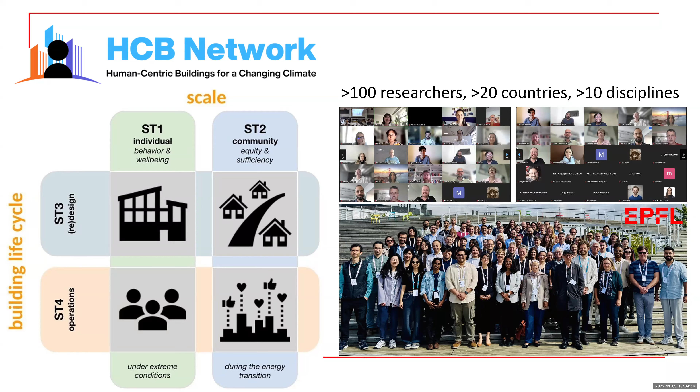With that said, I want to dive into this topic. I'm not going to talk about my PhD other than to give my origin story of why I went from being purely an engineer to recognizing the importance of people.

My PhD project involved developing a design tool that allowed designers to rapidly change different parameters for a house and understand the energy implications. But at the time, I was really frustrated because things like the set point, lighting, and equipment that people used tended to have a much bigger impact on predicted performance than things like insulation and windows.

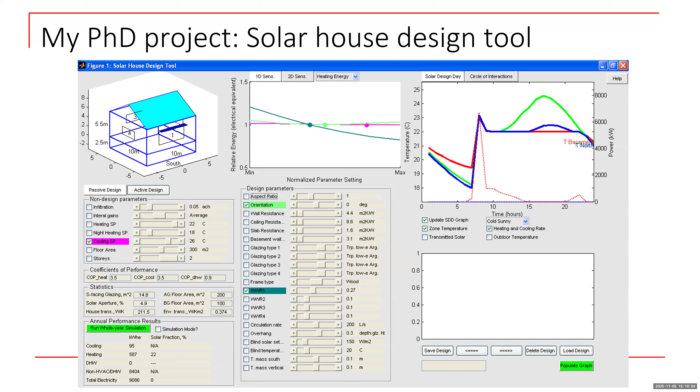At the time that was frustrating, but now I appreciate it opens up a huge area of research. It's particularly notable that as our buildings become more efficient—we've mastered envelopes and to some extent HVAC, our lighting's never been more efficient—the role of the occupants in relative terms is much more significant. That's one of the reasons we've seen an explosion of growth in this research area.

Back in my PhD, I had a case study building, an award-winning house, and I think it was very successful. But it was also eye-opening to me, because the house is textbook perfect: large south-facing windows, thermal mass, a PV and thermal roof, a ground source heat pump, which was fairly novel at the time. From an engineering perspective, this house is near perfect, and I still think it's a great house. But it was eye-opening when I talked to the occupants who moved into it, and looked at some of the things they did.

I'll just highlight a few things. One of the things they did was to cover the thermally massive floor, which has a very important role to store solar energy and release it so the space doesn't overheat. The occupants covered most of this floor with carpet and furniture, which renders it much less effective.

On the other hand, if you think about the perspective of the occupants, they didn't want a cold floor that they'd come down to in the morning with bare feet.

The north side of the house had almost no windows, and surprise, surprise, the occupants installed a lot of lighting, and it was not very energy efficient. Had the designers anticipated this, they could have at least put in energy efficient lighting. But the most surprising thing they did was to put a very high powered 5 kilowatt electric heater in the garage.

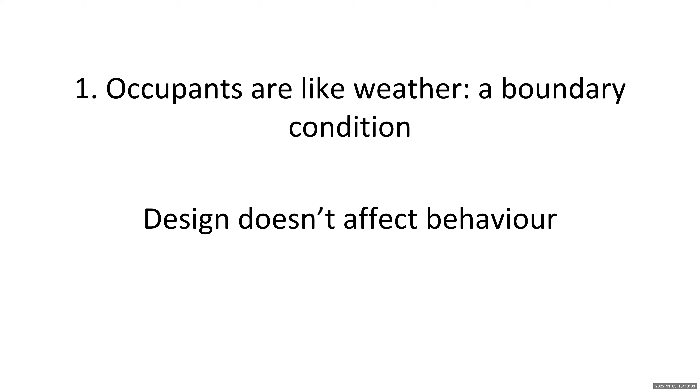So the first myth is that occupants are like weather, they're just a boundary condition. A translation of this is: design doesn't affect behavior. So that's our first myth of the day—people are not a boundary condition.

In the case of weather, if we're doing modeling, simulation, or even measurement of real performance, the weather affects the building, but the building doesn't really affect the weather. Of course there's things like climate change—I'm not denying that. What I'm saying is we don't usually design our buildings thinking we're going to change the local weather, except for some nuanced cases like microclimates.

In contrast, there's a two-way relationship between people and buildings. If people are not comfortable, for example, they will actively change the buildings. So it's simply not the same situation.

But unfortunately, this idea is often reinforced. This is a figure from the ASHRAE Advanced Energy Design Guide, which I think is fantastic because it tries to show in a single diagram all of the different building systems and the relationships between them and the heat flows. To look at this already is a huge upgrade from what's typically done, where we have kind of siloed design. But I'll note that sure enough, the occupants are in the corner, and they're merely, according to this, a source of sensible and latent heat gains, and also things like odor and CO2.

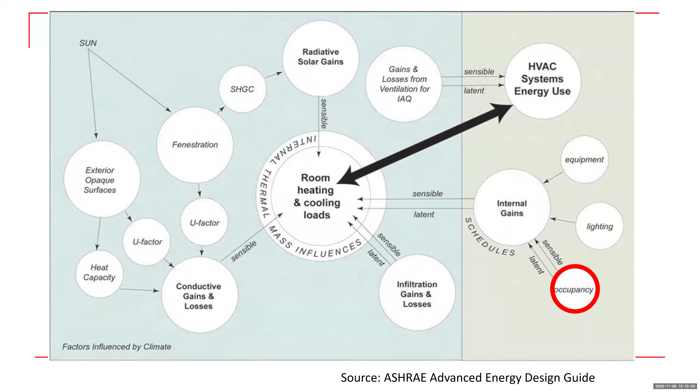So this is reinforcing the idea that occupants are just a source of noise. Building codes also tend to do this.

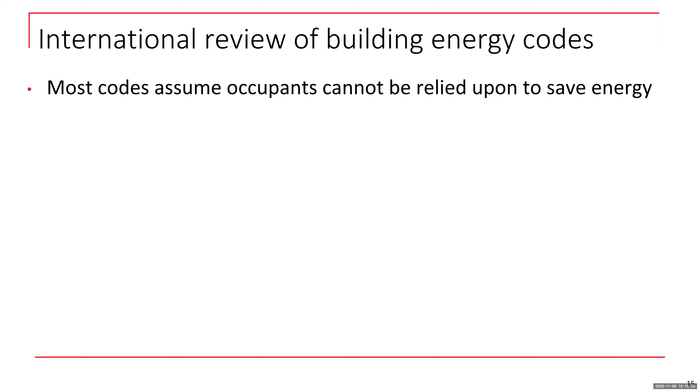We've done a huge review of building codes for our previous project, and we found a lot of building codes won't even acknowledge occupants. They have very indirect ways of saying people, users, or occupants without actually saying it. It's quite remarkable. And on the one hand, it's understandable.

For example, ASHRAE 90.1, which many building codes are based on, says in no case shall schedules differ where controls are manual. This is code for: you can't assume good things about occupants.

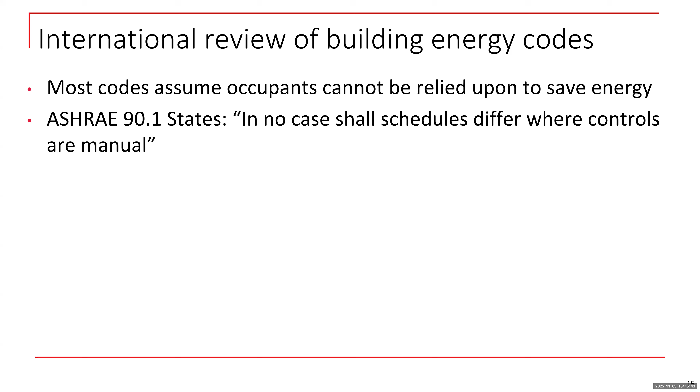And the National Energy Code of Canada for Buildings says something very similar—basically, you can make some assumptions, but you cannot assume optimistic things about people. This may be fair because it's obviously subject to lots of cheating if we make good assumptions about people, when certainly there's uncertainty.

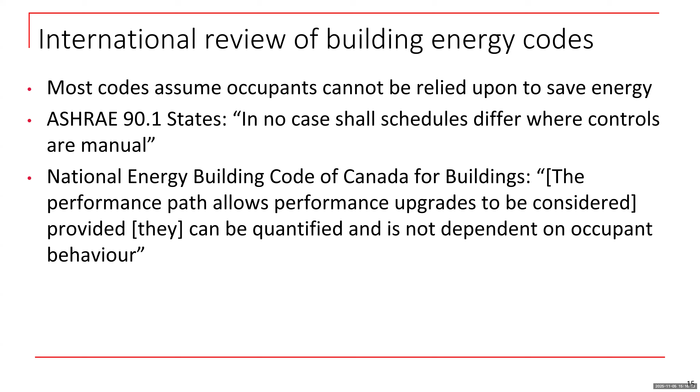But we're also taking the license away from designers to try to design better buildings for people.

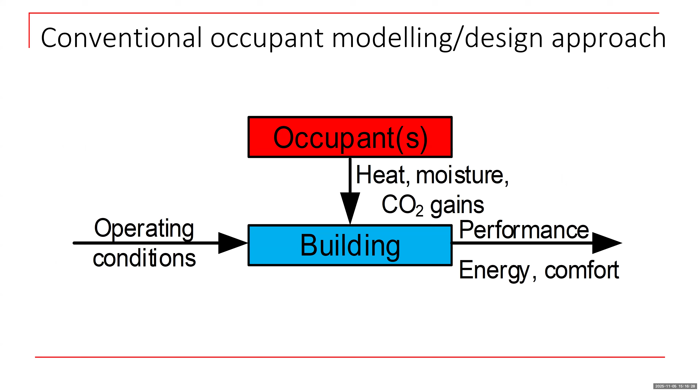So what I'm advocating for is going from this model that says occupants are just a source of noise on buildings, and that results in some performance, whether it's energy or emissions or comfort, to more of a two-way diagram that says buildings affect people, people affect buildings. There's all sorts of intermediate steps in there, like indoor environmental quality, interfaces that nudge people, etc.

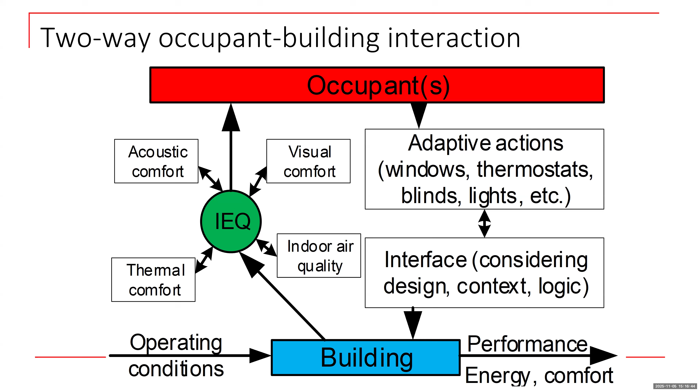More on that later. But just as one illustrative example for how design affects people, because I really believe a lot of designers, or especially engineers, don't think that you can affect behavior. I did a case study where we looked at two residential buildings in Ottawa. In brief, the one with big windows has occupants that close their shades or curtains a lot more than the one with small windows, so much so that effectively the open area where there isn't obstruction from shade or walls is very similar. So this, to me, is good evidence that you can affect behavior through design.

So the question here would be, why are we giving people these huge windows when they just keep them closed for privacy, glare, overheating, etc.?

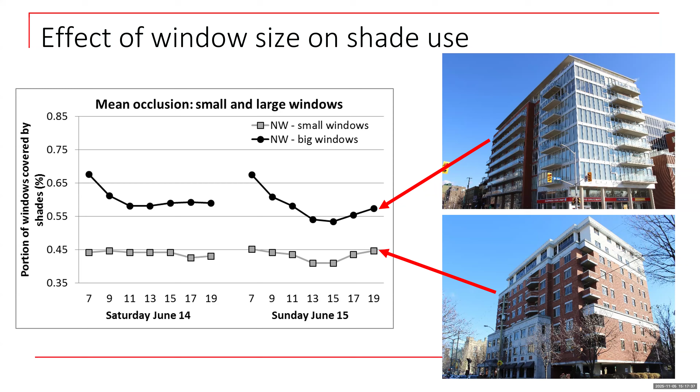I'll also note something we're looking at in our new project is nudging. Here's just a quick example of nudging. A study out of California found that if you signal people and tell them it's good to open the windows now, or it's not wise to open the windows now, then they will feel empowered and sort of validated to open the windows.

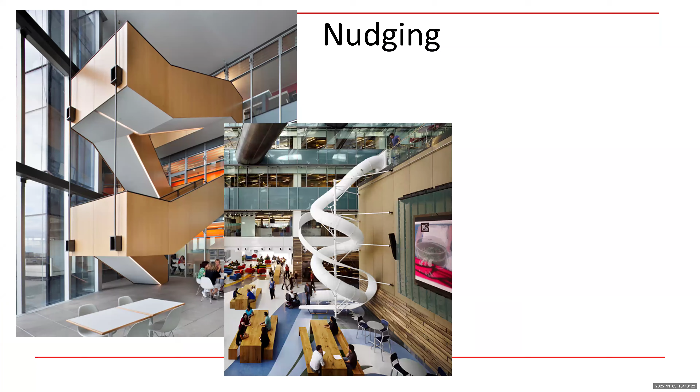Some other examples of nudging: providing nice stairwells, providing a slide even as an alternative to elevators, or messaging that encourages the more energy efficient behavior.

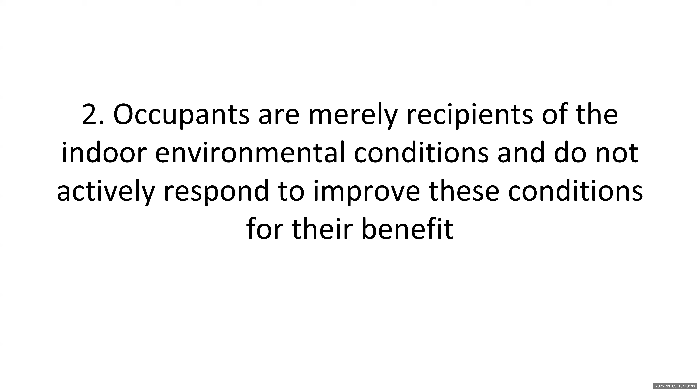Second myth: occupants are merely recipients of the indoor environmental conditions, and do not actively respond to improve these conditions for their benefit. I think this is also a myth.

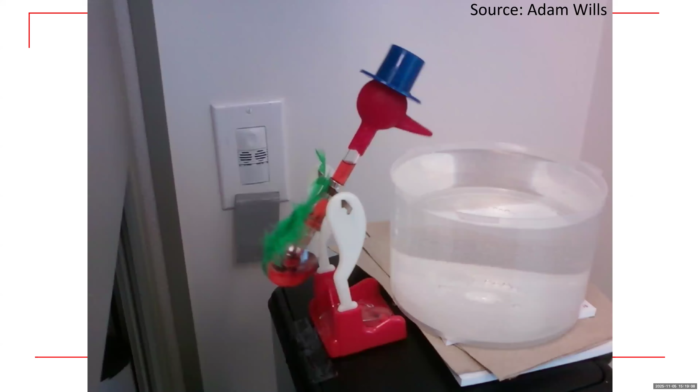Well, this is a case where the occupant, who has a PhD now, outsmarted the lighting controls. So what you're looking at here is a drinking bird that tricks the motion sensor to keep the lights on. But it was completely legitimate why the occupant didn't want the lights to turn off. He was around the corner from the motion sensor, so the lights were turning off prematurely.

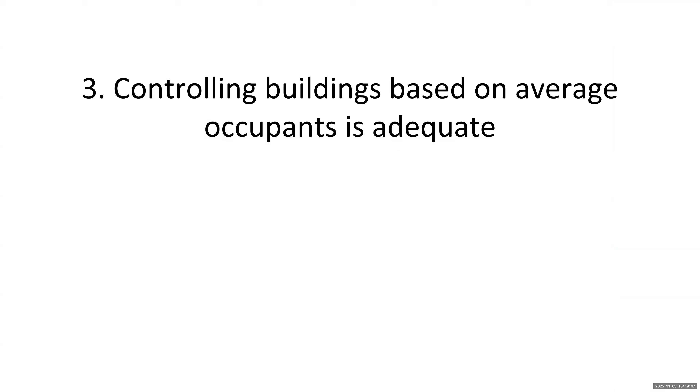Next myth: controlling buildings based on average occupants is adequate. There's just no such thing as an average occupant, or there is in the mind of engineers, but in reality, they're very diverse.

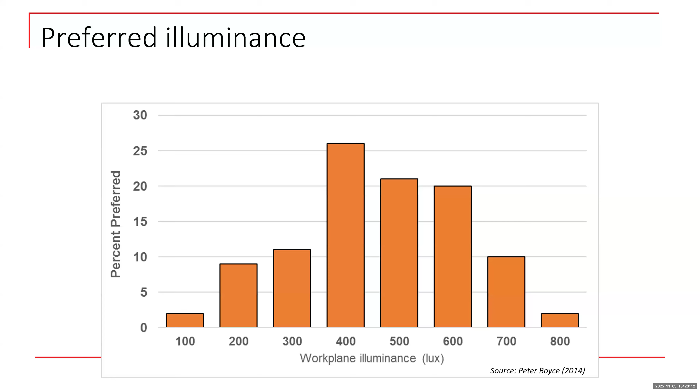Just one example: this is a study from 2014 that tried to come up with the preferred lighting level, I think it was in offices, and the graph shows basically the percent of people that preferred these various conditions, the units in lux. The engineering approach to this is, well, we need to come up with one value that will satisfy most or all. So we just need to choose one value because you can't really have a standard that has ranges, admittedly. So we need to pick that one value.

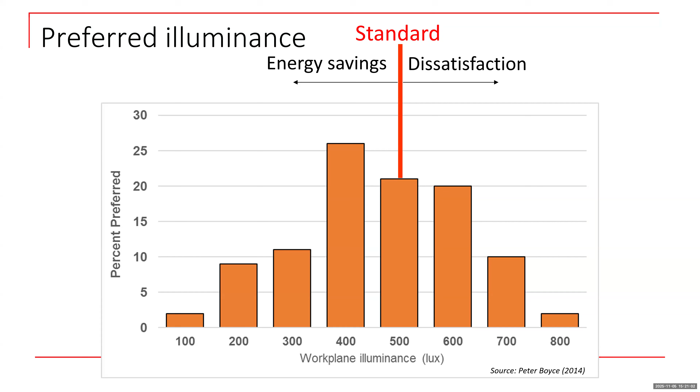The problem with this is that anyone that prefers less than that value would have saved energy if we gave them control. And the people that would prefer more, perhaps for legitimate reasons, like their eyesight isn't good, or they're doing an activity like drawing that requires a lot of light, those people would be dissatisfied. So to assume that everyone is like the average is quite problematic, and not just for discomfort, but also for energy savings.

This is one of my favorites: occupant diversity equals uncertainty equals bad. So engineers do not like uncertainty because uncertainty is very expensive. If there's uncertainty, we need to over-design and take conservative approaches because we don't want bridges to break, cooling systems to be undersized, etc. But I'd like to argue that actually diversity is an excellent thing, and I think we know this, we just forget about it.

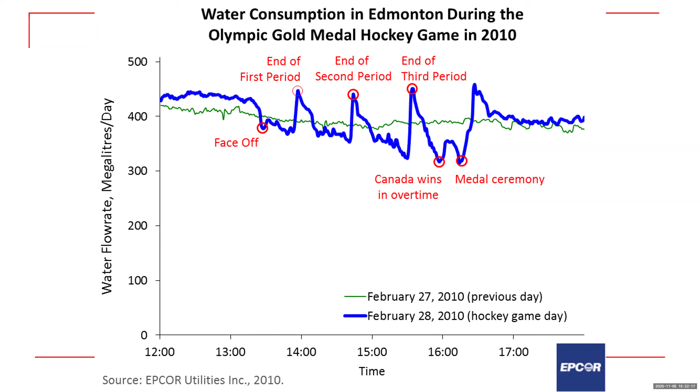Peaks are bad. Peaks mean that we need a system that can achieve the peaks. And if the peaks are really high compared to the average, then our infrastructure or our building needs to be able to achieve those, even if it's oversized for the majority of the time.

If we had average traffic all the time, we could get away with just a couple of lanes. So in a more grounded example, I've done some research looking at how diversity of office workers in terms of schedules can also be really good. Because if we design our office buildings so that on the worst case, the busiest hour of the year, there's enough desks, then we're going to end up with a lot of extra desks, especially in a hotelling situation where people do not sit at the same desk every day.

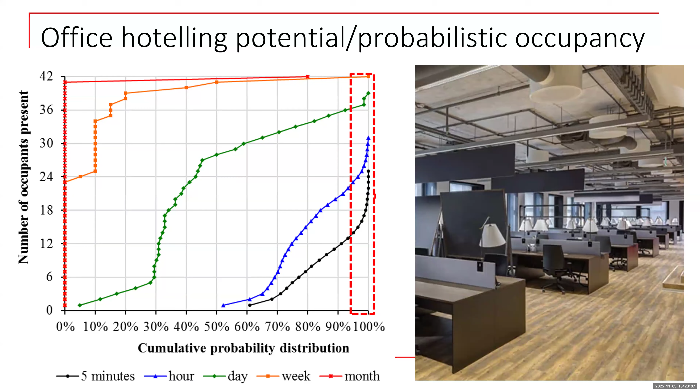Next myth: occupants do not understand how buildings work and will often waste energy relative to design intent. Engineers often will blame occupants, and in some cases that's legitimate. But I'd like to say that that's generally a myth, and I don't think occupants willingly or intentionally waste energy. It's more that they do things that make sense to them, and if that wastes energy, well, maybe we should look at the designer. I'll give one quick example.

My PhD student, for his very first paper, noticed that his friend was keeping his apartment really warm, and my student was not keeping it warm. He asked, how can you afford to keep it so warm? His friend said, well, I don't pay for the heating. It's just included in rent as a fixed fee.

My student measured the temperature in 20 what we call bulk metered units, apartments where heating is included, and 20 where they pay for exactly how much they use. What he observed over the whole heating season is that tenants who paid for their heating kept their apartment on average about 2 degrees colder than their counterparts.

To me, this is an excellent example of how people know how to save energy. If you charge them or have other incentives, they know how to save energy. He also found that the people who pay were much more diligent about keeping schedules, for example, turning down the set point when they were off at work.

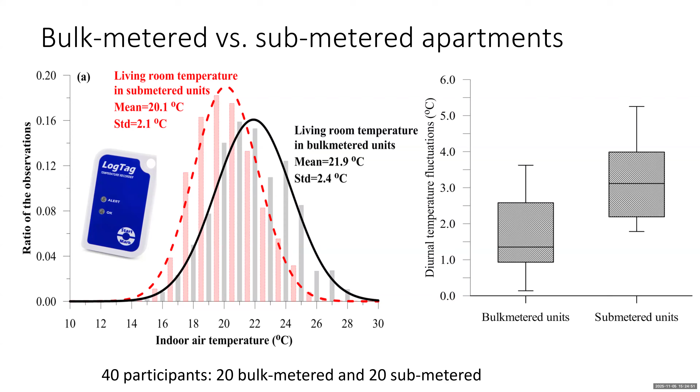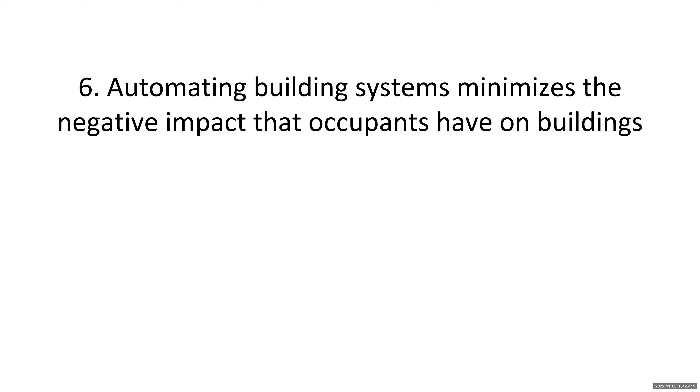Next myth: automating building systems minimizes the negative impact that occupants have on buildings. Engineers like to automate everything because they're very comfortable with things like programming and logic. They're not so comfortable with the complexity of humans. I'll give one example.

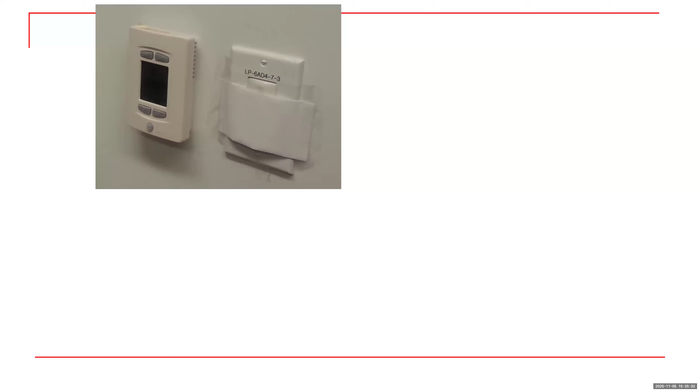This is a building at Carleton University, and it's extremely well daylit, which is very relevant here. The outside of the building is surrounded in professor offices, and the windows are massive, arguably oversized. What we noticed when we did a post-occupancy evaluation here, and it was very surprising, is that many of the occupants covered their motion sensors with tape or paper or even plants. This is quite different than what I showed in the previous example.

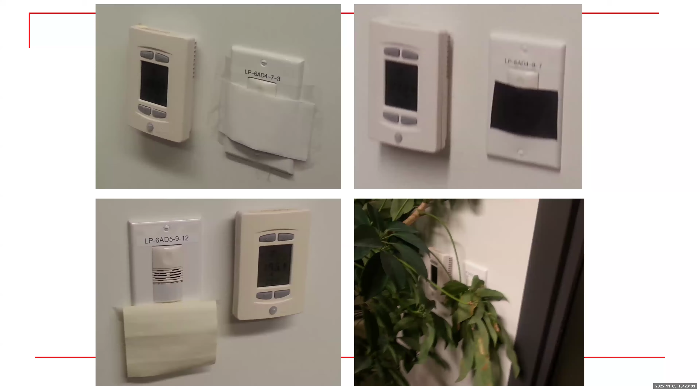We asked them why, and they said, we don't like it when the lights turn on automatically when we walk into our office, because the default controls at the time seem to be that the lights turn on automatically when they detect motion. This is actually against the code now, which I'm glad to say, because it doesn't make much sense. What we discovered is that it's very easy to change the controls.

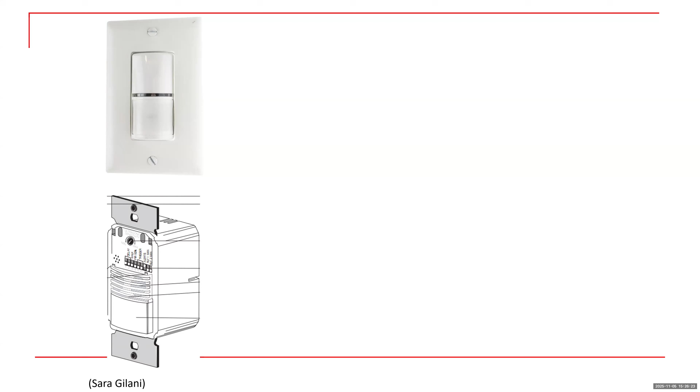So we left the bad controls for a year. We made an intervention where we changed it so that the lights only turn on if someone turns on the light. This saved 95% on energy use. It's not a lot in absolute terms, but in relative terms, it's quite amazing. We have a situation where the people didn't like the automation system, and that automation system was actually taking more energy. So the result was happier people who are using less energy.

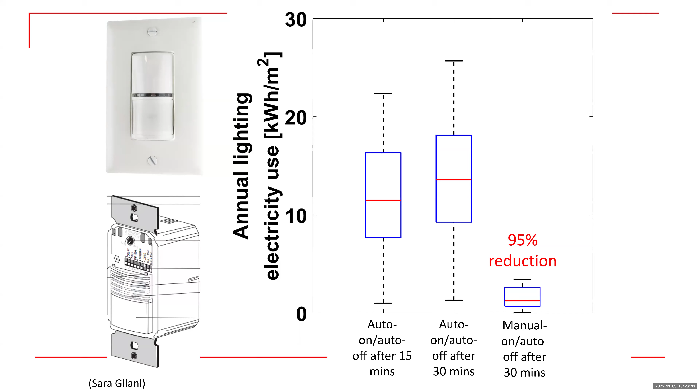A big open question for designers, not just engineers, is how much should we automate our buildings? Engineers will say, automate like crazy, use AI, we can predict everything, because engineers also have that level of ego oftentimes. But other disciplines might say, actually, we should give a lot of control to people because we know, for example, that people who have more control will be more tolerant of a wider range of conditions. A wider range of conditions translates usually to energy savings.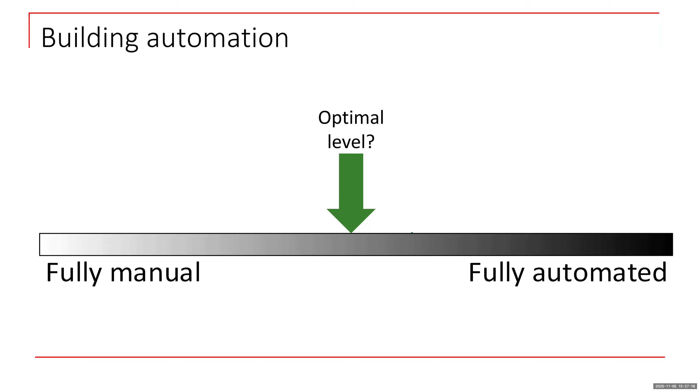Next myth: providing ideal indoor environmental conditions can replace the need for giving occupants control. This is quite related to the previous one. I'll give the example again at Carleton. We did a field study where we went into about 200 professor and staff offices and asked them many questions.

One of the questions was, have you plugged in anything to improve your comfort? To my huge surprise, about 50% of occupants had plugged in a space heater, a fan, a humidifier, an air cleaner, etc. The most problematic situation, and there were quite a few of these, was where they'd plugged in a space heater in the cooling season because the building was being overcooled.

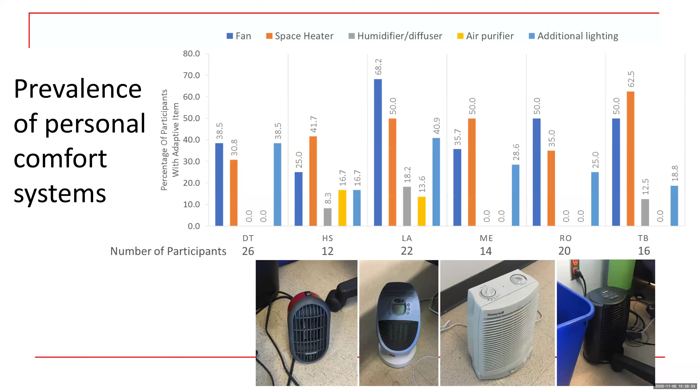While this is a pretty energy inefficient way to achieve comfort, it tells us that trying to provide comfort centrally is really challenging, to the extent that I would argue it's basically impossible, given the number of circumstances and contexts and the diversity of people's preferences. It's really hard to achieve comfort with a single set point on an entire university campus.

Some of the solutions we're looking at, and other IEA EBC projects are looking at, are personal comfort systems that acknowledge you cannot centrally and perfectly control the environment. Not only that, but conceptually it doesn't make sense to condition buildings — it makes sense to condition people. These technologies provide two benefits: heating, cooling, and lighting people or their direct vicinity, but also giving them individualized control. It just makes so much sense.

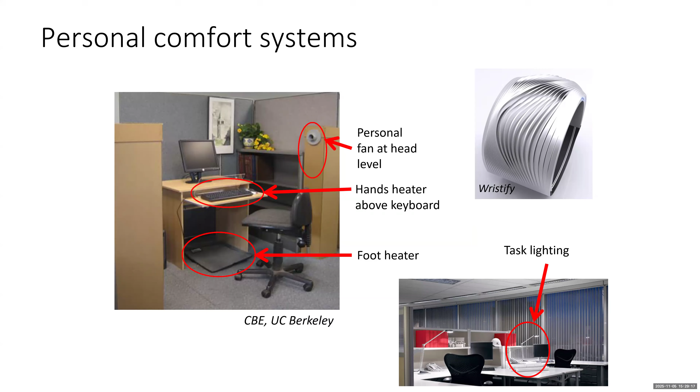I'll give another example where there was some effort to incorporate comfort in design: the NREL RSF building in Colorado. What they did, I think, is quite brilliant — they designed the interior to avoid any direct glare. The bottom half of the windows allows daylight through and views. The top half has light louvers which reflect light up onto the ceiling. This is good for getting daylight deep into the space, but it also prevents glare for people at their desks, because any light that would hit the occupants is reflected up onto the ceiling before it can hit them.

Next myth: occupants function on regular clockwork-like schedules. This is reinforced by building codes, and it's understandable why, because we do need some reasonable assumptions. But at the same time, it's not very realistic.

There are many examples comparing occupancy — the presence of people — and behavior to standards. Inevitably, they almost always show that the assumptions are that occupancy is high, hours are long, etc.

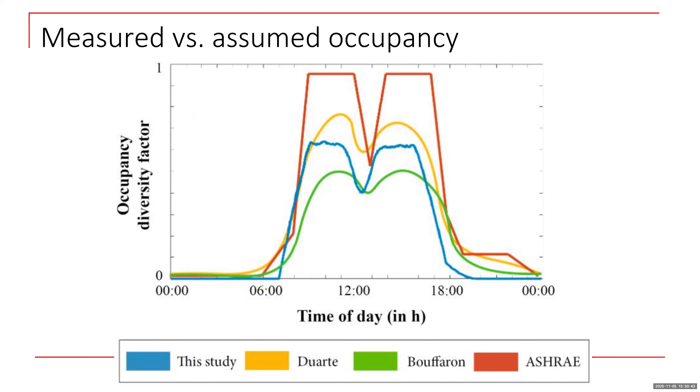Similar things for lighting. This is work that's a couple of decades old, from Christoph Reinhart when he was a PhD student, showing for 10 individuals the probability that they turn on their light when they arrive in their office. We can notice a few things here. I shaded this yellow area to show what engineers might assume: people want 300 lux or 500 lux, so if the light's below that, turn on the light — kind of like the way a robot would behave.

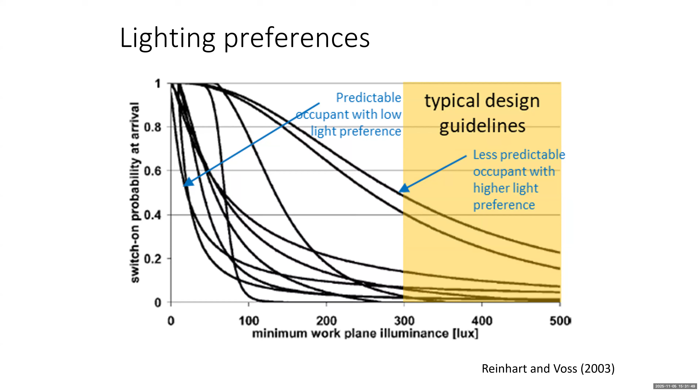The reality is people are diverse — these lines take very different forms. Even if you don't follow the graph, you can appreciate there's huge diversity. The conditions that trigger people to turn on the lights are much lower than the standards would indicate. In other words, people are happy with much lower light levels from daylight than what the standards indicate.

Speaking of occupancy schedules, we did a case study where we talked to three professionals working on the same building in Toronto — the architect, the energy modeler, and the mechanical engineer. We asked them what assumptions they made about people, and also the lighting and equipment, which are all related to the occupants.

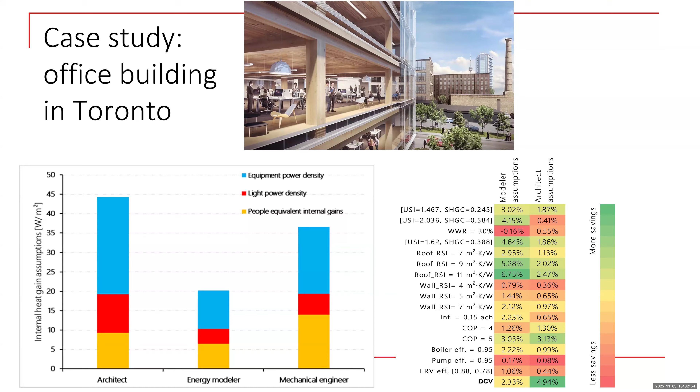We found huge diversity between these three parties, and I don't think that's necessarily a problem or surprising — the mechanical engineer's job is to make sure the cooling equipment is sized big enough, so of course they'll have higher assumptions, because they need to make conservative assumptions. I think the problematic thing is how this translates into design, because the different assumptions lead to very different optimal design decisions. While the assumptions are sort of inconsequential in their own right, the design is something we're stuck with for the rest of the building's life.

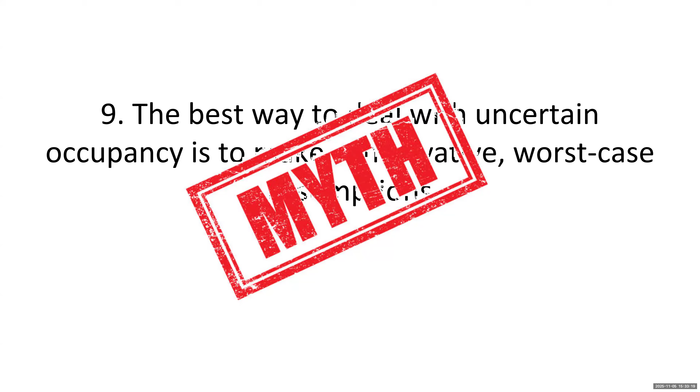Next myth: the best way to deal with uncertain occupancy is to make conservative worst case assumptions. I think this is also a myth, and this relates a bit to diversity. Diversity is a good thing. If everyone behaved in the worst possible way, then yes, we should make conservative assumptions. But I don't think it's reasonable to assume everyone behaves in the worst possible way.

I apologize, this is probably the most technical slide here, but I'll keep it high level. I did a study where I measured lighting and plug loads, so equipment use like computers, in many different offices. And then I sampled that repeatedly to understand the probability that we truly have a building with those worst case conditions.

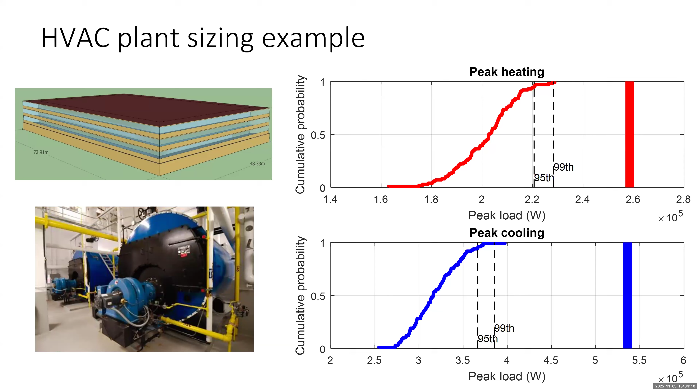What I found is that there's a big gap between what the building codes and standards tell you to assume and those very worst case scenarios. In other words, if we follow building codes and standards and those assumptions related to people, it will tend to lead to oversized equipment. And this is just one example.

Next myth: indoor environmental quality, or IEQ, is a purely physiological phenomenon that we can accurately predict from first principles in engineering.

Engineers are very comfortable with things like heat balances and this Fanger thermal comfort model, which I describe as a blob, because it's basically engineers speak. It treats the human as a blob for which we can draw things like boundary conditions and arrows indicating heat flows. The Fanger model is based on the premise that if all of the heat generated from our metabolic rates, basically our calorie burn, equals the heat loss from convection, so from airflow near our bodies, and radiation and sweating, and this is reduced by clothing.

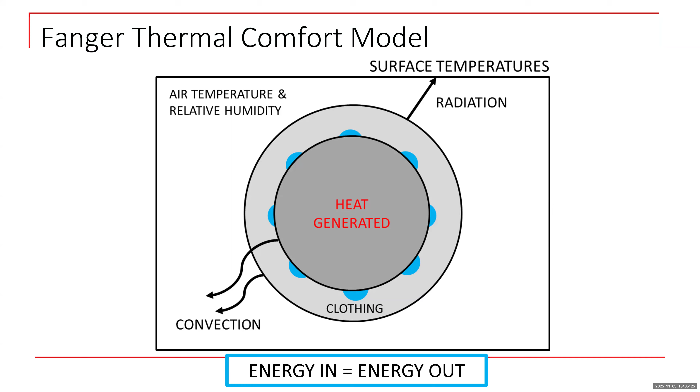If all the heat gains and heat loss is balanced, then someone should be comfortable. And I'm simplifying it a bit. The problem with this is that it ignores things like people's personality and preferences and psychology and previous experiences and tolerances and things like that.

So about 25 years ago, the research world developed something called the adaptive thermal comfort model, which says we can ignore most of that heat balance. While there's some truth to it, there's also a lot of other considerations like the psychology and behavior of people. What this model says is that the only thing we need to do to predict whether someone will be comfortable is to know what the temperature is outside.

And this is a really uncomfortable thing for engineers, because why does the outdoor temperature matter? The outdoor temperature was not in the equation or in the model I showed on the previous slide. Why does it matter? Things like people get accustomed to certain temperatures, they dress appropriately, they can open the window strategically to let in cool air or warm air.

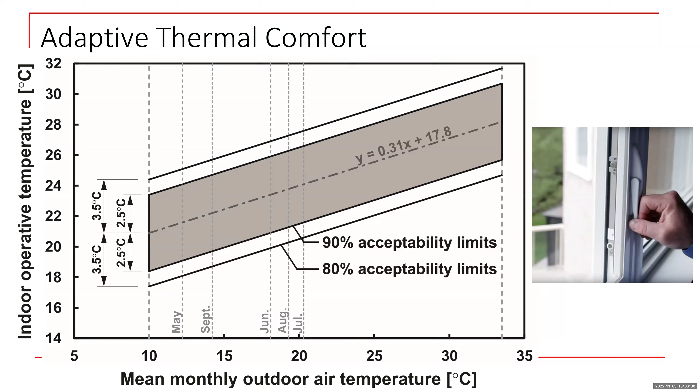This is fairly profound for engineers. And unfortunately, it hasn't been adopted as much as I'd like.

In another example from Finland, this study called a few thousand people and asked, what's your satisfaction with room temperature in these various places? In your house, or in your apartment, in your private office, in your open plan office, etc. I don't want to go through every result, but the trend is really clear.

It's downward, and from left to right goes from a single family house, where you have ultimate control over the temperature, you know the people you live with, so you're not uncomfortable negotiating or maybe fighting with them, etc. And on the other extreme, we have open plan offices.

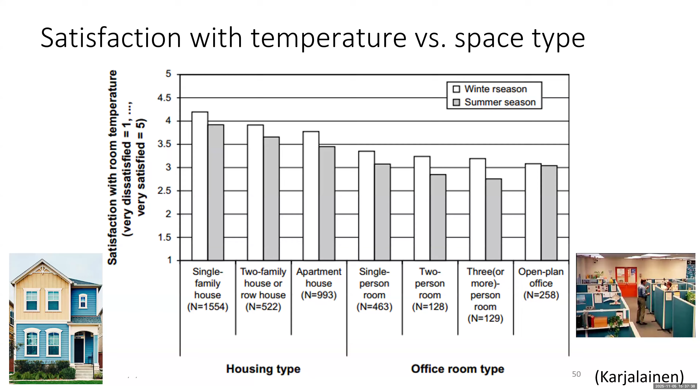There might be one thermostat if we're lucky, and we can't control clothing level, unless we want to get fired potentially. Certainly not to the level that would lead to ultimate control over comfort. And interestingly, they found the fact that the HVAC is opaque, it's behind the ceiling, you can't see what's going on, means that you don't understand it and you're less likely to be satisfied.

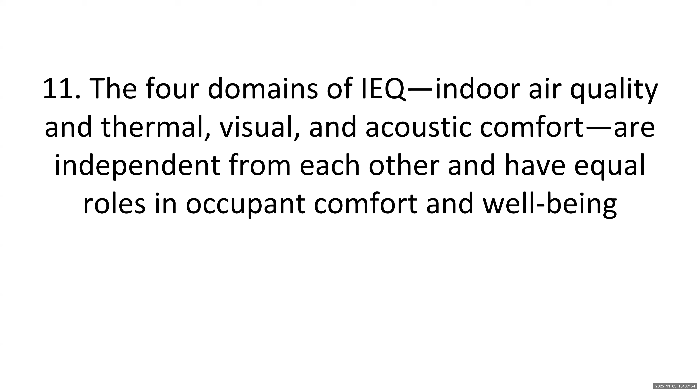Next myth: the four domains of IEQ, so indoor air quality and thermal, visual, and acoustic comfort, are independent from each other and have equal roles in occupant comfort and well-being. This could be a whole talk in itself. But in brief, these are the four domains of indoor environmental quality.

One of the issues among many is that usually there's one professional designated to addressing each of these. So, for example, the mechanical engineers often take care of the indoor air quality through ventilation. The architects also look at things like material selection. The architects might look at visual comfort from a daylighting perspective. Maybe electrical engineers are looking at lighting.

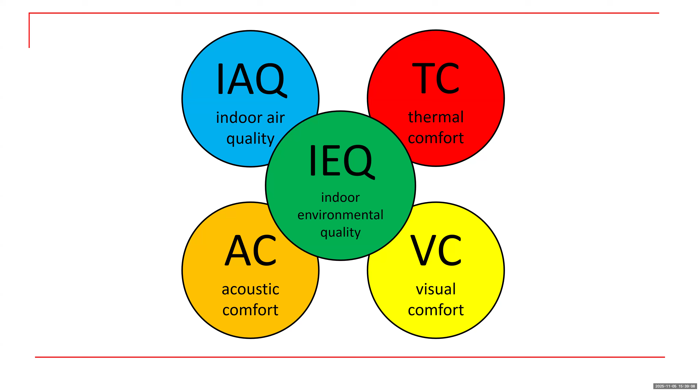There isn't usually a professional looking at all of these simultaneously, and so often there's trade-offs between them where we try to improve one and forget that that's going to affect the others, often negatively. The other thing is that engineers want to weight these equally, say each one is worth a quarter of the total score. The reality is that if we're blinded, or if temperatures are really warm, like 30 or 40 degrees, probably the others are not going to be that important. So the idea of weighting them just doesn't work well in reality.

And the last myth: energy efficiency and renewables are the only way to achieve energy savings. Engineers love technology and design that can force things to happen predictably, but in our work we like to think of another aspect, called sufficiency.

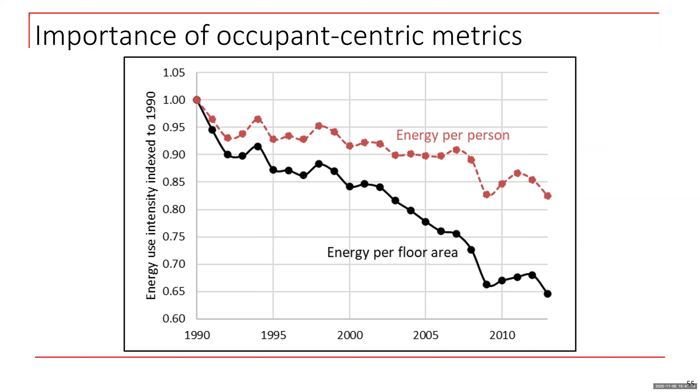There's a concept called sufficiency, which is the third pillar in addition to energy efficiency and renewables, that says we probably don't need as much floor area. We can achieve that through things like sharing spaces, improving efficiency, home swapping - something the Airbnb model maybe sought to do before it got very commercialized, the idea that if you go on vacation, someone could use your home - so we don't actually need as much floor area for the global building stock.

Sufficiency looks at reducing floor area, but this shouldn't be seen as suffering or poverty. It's more about improving utilization, and even providing more amenities that individuals might not be able to afford, like a community swimming pool or community pizza oven, things individuals typically could not afford on their own.

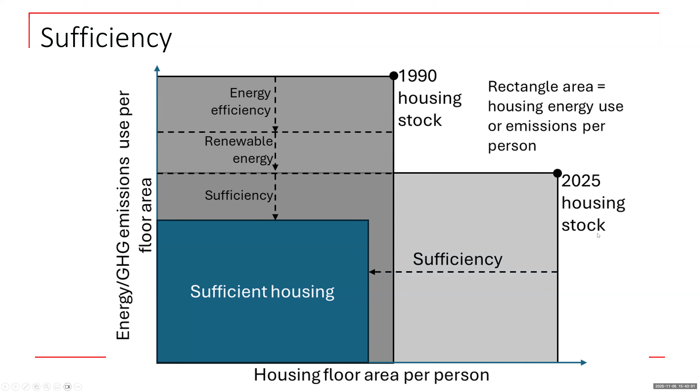The other thing our project is looking at is resilience at the community level, recognizing that resilience is not just about battery backups or diesel backups or well-insulated buildings. It's also about relationships with neighbors, so that if someone's sick we can rely on local neighbors for healthcare, for food, for exchanging or trading goods and services and tools, etc.